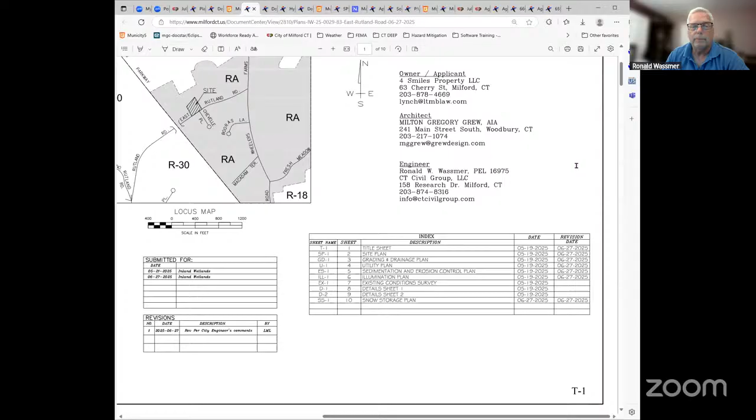A couple other minor changes. If we look at sheet SP1, we've added a couple bits of information. In the northeast corner, we've extended the landscape retaining wall to intersect the existing stone wall. That was a suggestion of the commission, as well as the biologist, Matt Pop, who is here this evening.

We've added a note about the seeding of meadow mix in the northwest and northeast corners. And we've added a note requiring signage along the proposed stockade fence that runs along the rear of the property, stating caution wetlands beyond this fence, no dumping. So an additional notification - the fence will serve both as a landscaping wall and a physical barrier, but the signage will clearly spell out to someone unaware that there's wetlands on the other side of the fence, which aren't directly adjacent but are 40, 50 feet away.

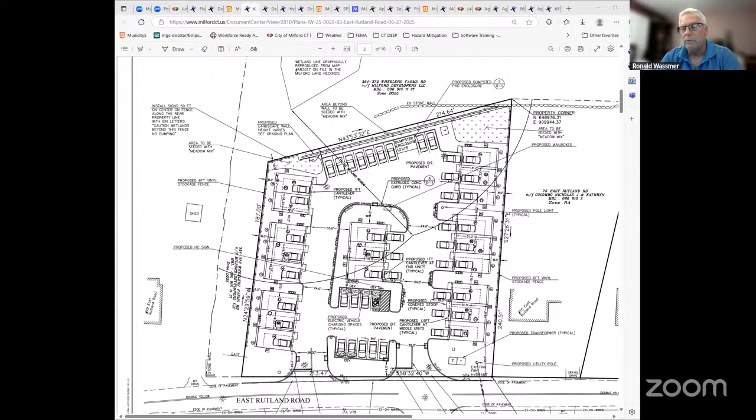So those are my comments. I don't know if Matt wants to chime in, or if you have any questions for me, I'll be happy to entertain any questions.

Thanks, Mr. Wassmer. Mr. Pop, do you want an opportunity to add anything to the record? Good evening, I'm Matthew Pop, landscape architect, professional wetland scientist, Environmental Land Solutions.

The only thing I would add is we added that small section of wall from the retaining wall to the existing wall. I think maybe right where it meets the existing wall, we want to remove 2 feet of the existing wall, so any turtles that may walk up in there don't get trapped in that V-shaped area. So right there.

Thank you, Mr. Pop. That was going to be one of my questions. On the plan, it becomes obvious. Okay, thank you very much, Mr. Pop. Any questions from the agency?

Mr. Black. Yeah, through you, Mr. Chair - it was mentioned a couple times in the engineer's report about a detailed operation plan for snow storage if it exceeds the limit on the plans. Is that something that is in the works?

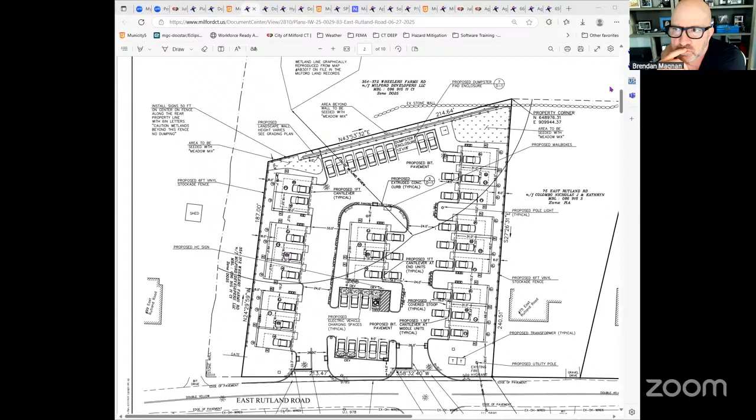I believe we saw that on the plan when Mr. Wassmer was speaking to it. MaryRose, can you go back to that section of the plan? I believe that's the last sheet 10. I believe that may be addressing your question.

Yeah, but in keynote C, it said alternate measures employed if stockpile reaches capacity, in the event of multiple snowstorms occurring prior to melting, or a snowstorm of greater volume than can be accommodated - excess snow will be moved off-site. Does that need an operations plan to move that off site?

I would ask the question to Mr. Jim Connors. Normally, what do we do there for MaryRose? Is that usually sufficient, or I kind of defer to you guys on that part? This is your expertise.

You're on mute, Jim. MaryRose, can you unmute him by any chance? There you go. Okay, yep. I just got into the meeting, it wouldn't let me in.

What was the question, Brendan? Mr. Black is asking about Article C, and it refers to if the snowstorm volume is greater than the stockpiles can handle, it would have to be removed off-site. And is it sufficient? In the real world, what would happen is some of the parking places would get taken up with a pile of snow.

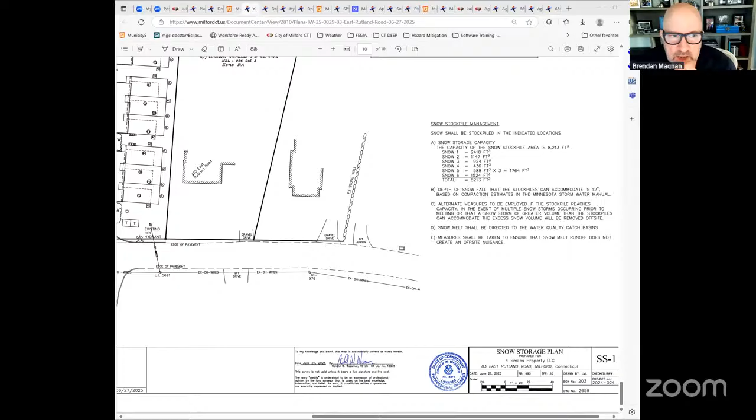Again, back to Mr. Connors, because we kind of defer to you on these. Yeah, you were in late. MaryRose, can you just kind of show the plan itself as to how the applicant has proposed it, and do you have any observations or comments around those?

Looking at the plan where it's showing Snow 5, but it'll never get pushed into there in 100 years because snow doesn't like to go around corners. Snow 6 will get snow pushed in. Snow 5 again, possibly, but they're going to end up using those parking spaces because you get over a few inches of snow, and in that parking lot, you're going to have a lot of volume by the time it pushes all the way down there.

There seems to be 3 Snow 5s. There's Snow 5 and there's Snow 5, it's the 2 corner islands at the end of the parking space. Snow 6 is in the center. Right, but at the actual bottom of the plan there are 3 Snow 5s. Well, the snow is going to get pushed. Yeah, well those side ones, very little snow is going to end up there. Snow pushes straight, basically, and it's going to be pushed down right at the end of that driveway where it's going out.

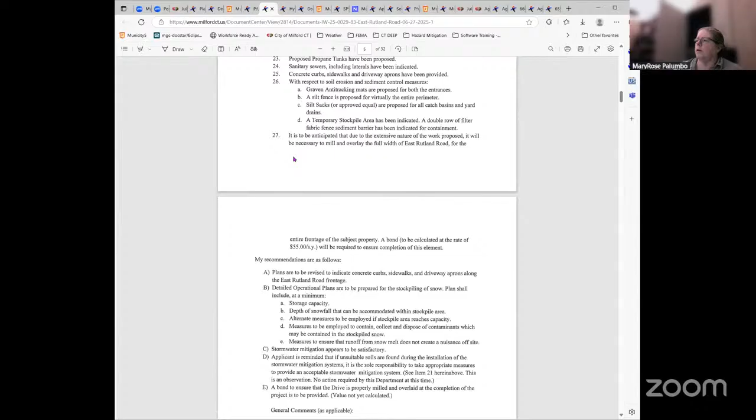And then, MaryRose, can you just show us the exchange from the engineer and the confirmation from him acknowledging that he is satisfied? Well, what you're seeing now is the city engineer's memo from June 26th. It enumerates what he looked at and each of his steps. I've settled here on the recommendations, although I can run through the whole memo if you'd like.

No, that's fine. Okay, I see Article C, as was testified by Mr. Wassmer. Okay. Any other questions from the agency?

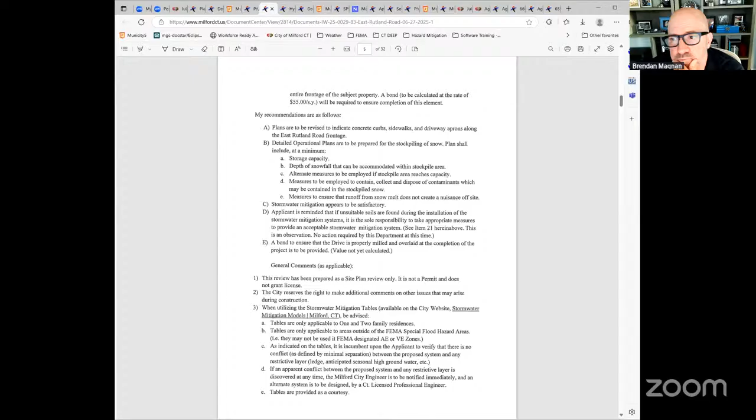One question, is there extra parking places in this plan other than visitor parking places? Yes, there are. So the largest snow pile that we proposed is snow number 1. So those are in excess of the parking and exclusive of the electric vehicle charging stations, which we have several of, maybe 6 or 7.

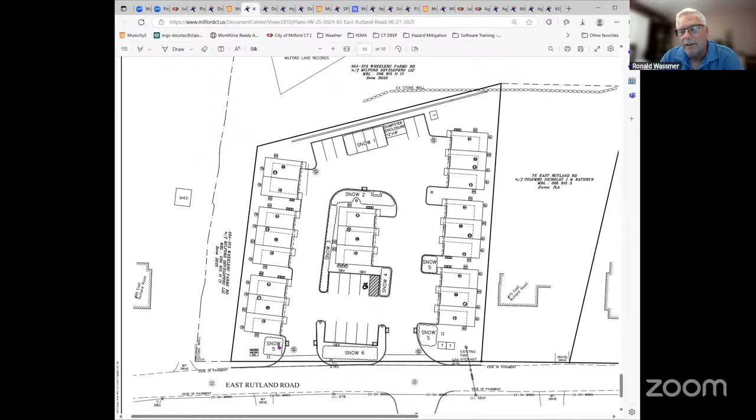You did comment, or Brendan commented, that there's 3 areas labeled as snow number 5. So the reason there's 3 of them is they're all generally the same size, and on the right side of the plan we defined the dimensions of those piles. So you'll see snow number 5 times 3.

How big are those number 5 areas, Ron? About 600 cubic feet. So like 15 by 15 by, I think I went about 4.5, 5 feet tall. None of them are excessively tall. Maybe number one is 7 feet tall, 6 feet tall.

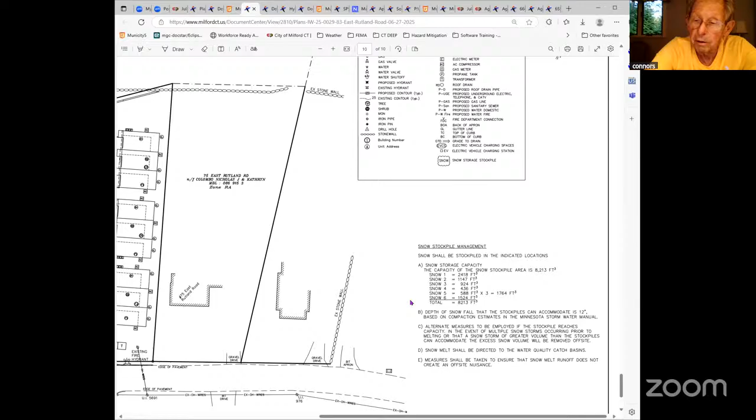Okay, well the ones that are going to take the most of it, truthfully — I'm not against it — but those end parking spaces, because the snowplow is going to push straight down those driveways first, and then clean out the parking area. Again, this is for a 12-inch storm, which isn't really a frequent storm in Milford. But in the event we get a 12-inch storm, they could bring a loader in here to move the stuff around more so than just a plow.

Yeah, okay, no problem. Because we end up, as you know, at our complex doing the same thing. Thank you.

Okay, great. Any other questions unrelated to the snow shelves? Okay, what's the prerogative of the agency? It sounds like we have an understanding of the application. We've discussed it, we've asked numerous questions. The applicant has made numerous improvements based on the discussions, including the acknowledgement of the fence for the turtle.

Maros, how would we address, if we were inclined to make a motion in favor of this, Mr. Pop's comment tonight that the plan would need to reflect that there would be this gap for the turtle not to get caught in that V? Would that be just a condition of approval?

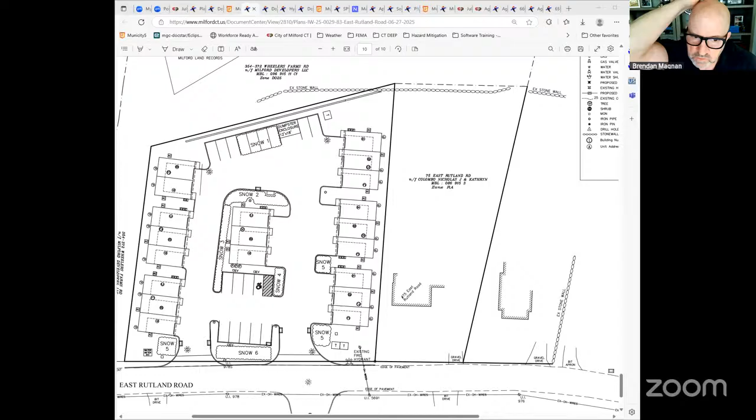That can be a condition of approval. That can be added, saying something to the effect of landscaping, minor landscaping changes per the landscape architect.

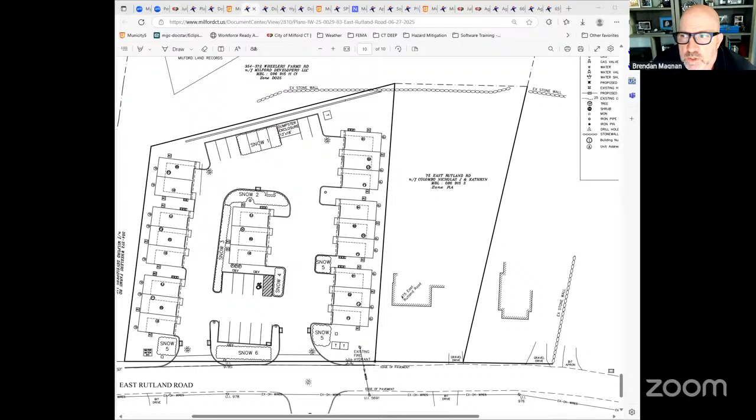Yeah. Thank you for that. I have a comment, if you don't mind. Yes, go ahead, Mr. Mossman.

You can make the statement that the connection of the landscape wall to the stone wall will be done at the direction of the wetland biologist. Thank you for that suggestion. Appreciate that. Thank you, partner. Sounds good. Great.

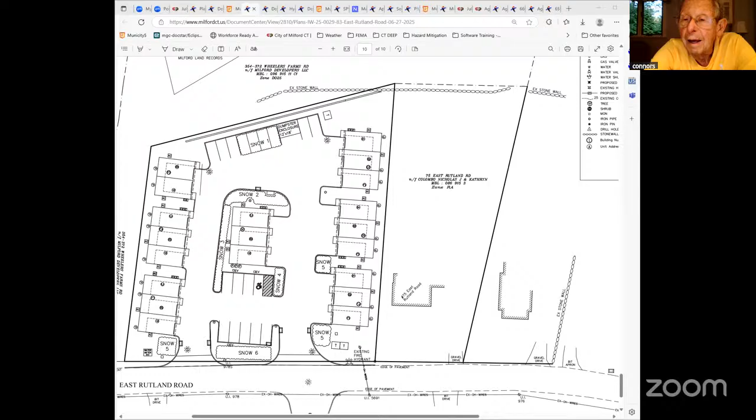I'm pleased with the modifications. I'm assuming, since there's no other questions, we're in a position to take an action. Is there someone that would like to make a motion? I can make the motion. Go ahead, I'll second it.

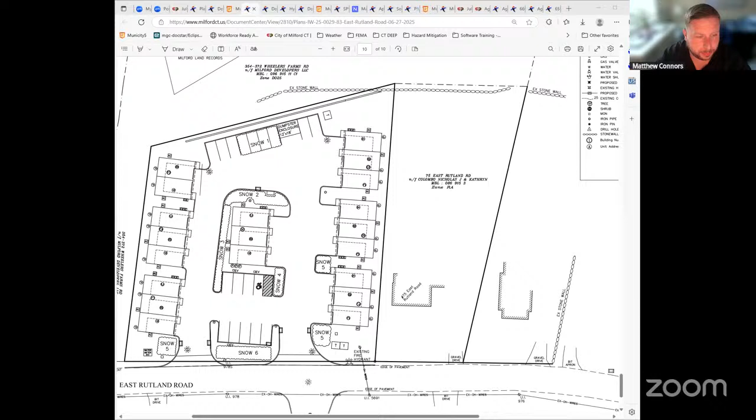Mr. Chairman, I move, after duly considering all relevant factors, to approve application IW-25-0029, 83 East Rutland Road, based on the plans entitled Site Plans 8-30G, Affordable Housing Project, 83 East Rutland Road, Milford, Connecticut, by CT Civil Group LLC, 10 sheets, 1 through 9, dated 5/19/25, revised 6/27/25, sheet 10 dated 6/27/25.

The information in the file and presented this evening supports the following reasons: this action will not have an impact or effect on the physical characteristics of the adjacent wetlands and watercourses, with conditions including the permittee will submit a construction plan prior to taking out the permit; soil erosion and sedimentation controls as outlined on the plans and in the CT-DEP 2024 erosion and sedimentation control guidelines must be installed and maintained on the site until the property is stabilized; wetland notification to be placed on the as-built and in the property deed to give notification to property owners that permits are required from the MIWA to work on the site; compliance with the city engineer's requirements for stormwater; and adjustments made to the landscaping as guided by the biologist. That is my motion.

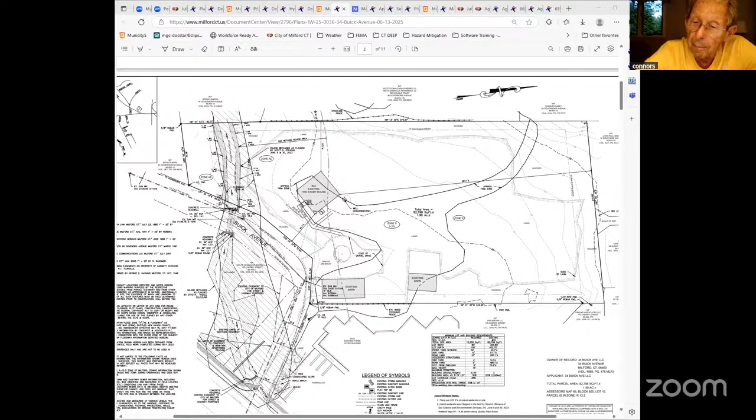I have a couple of questions on the paver driveway or parking area. My gut feeling is that if that paver driveway or parking area doesn't remain super clean in all the joints from dirt from the tires or whatever, I can't see how it's going to drain that parking lot other than surface draining into the brook. For what reason did you go with that versus a conventional drainage system with galleys and catch basins that ultimately end up in the brook, which doesn't need as much maintenance as the paver driveway, since that's going to need a lot of maintenance to keep functioning?

I think that's a good question. Mr. Weway, do you want the opportunity to answer that now, or answer it during the public hearing, or both?

I think the bulk of it will be presented at the public hearing, but to answer the question with regards to why we chose the pavers as opposed to a galley type system: it's because of the proximity to the wetlands and the stream. If you look at the test hole data, we don't have very deep soils throughout the site to be able to put a galley type system in, because typically your galleys are going to be anywhere from 18 inches to 4 feet high. By the time you factor in your separating distance to the seasonal groundwater table and provide sufficient cover over the top, you need pretty deep soils to get that type of system in. Again, the pavers distribute the stormwater over the entire site, whereas with galley systems, all that collected water gets concentrated into a very small area, depending on the size of the galleries. So by spreading the system out over pretty much the entire site, your groundwater mounding that typically takes place is much less than what you'd encounter within a galley system.

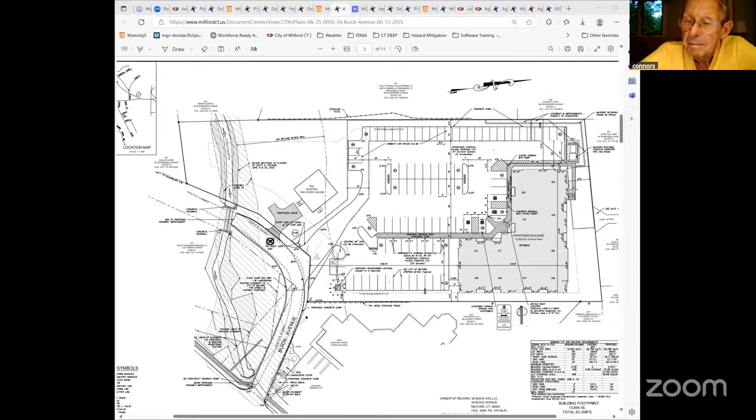Mr. Weiwei, when you're explaining this to us, could you also incorporate what considerations went into your selection of this best practice? Specifically, was this system more expensive, less expensive, or cost neutral compared to other options, in terms of one-time costs and overall long-term maintenance costs? Help educate the agency on what the considerations were as you weighed these best practice options.

Yes, we could certainly incorporate that into the presentation. Great, thank you. Mr. Matt Connors, I think you were up next.

Through you, Mr. Chair, just to your point during the site walk, maybe some language about cleaning up that area that had some dumping in it. I appreciate the planting list, but maybe also incorporate, you know, highlighting the fact that there are trees on the property being removed, and then highlighting that they are being replaced to a certain extent within the plans.

To echo that, I think the agency, on complex applications like this, would like the applicant to clearly lay out what trees are being proposed to be altered or removed in any way, and what plantings are being proposed. I'd like that to be a topic of focus as well.

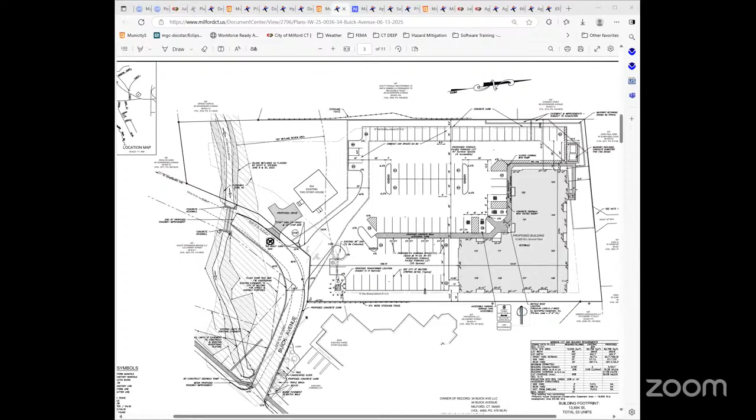So this is a little bit nuanced, right? They're going to have to secure the rights to do the development, and we still have regulation authority regardless of who owns the property. Right, MaryRose? This is Attorney Crusaden. When you're done speaking, if I can also make a comment on that. Thanks. Okay, sure. Through you, Mr. Chairman,

the development requires changes to the road. There's easements along the road to do changes if and when they're necessary. Development of this property would necessitate those improvements to the roadway. So yes, we're regulating that work. The reason we walked that, the reason we asked to have it staked, is we're regulating work which is within 100 feet of the off-site wetland, which had been previously flagged, I believe, in 1995 -- 1990. The closest point is right by the throat of the roadway where the storm drainage will go into the culvert. It's about 4 feet from the wetland there, because the wetland goes right to the culvert, and then pulls away a bit when you come around the curve on Buick Avenue.

I think Mr. Crusaden is going to embellish on that. Great, sure, go ahead, Mr. Crusaden. Yeah, thank you, MaryRose and Mr. Chair. It's an excellent question. Buick Ave is a city street, and as part of the development in the area where the billboards are, there was an approval done years ago for a very similar project, I forget exactly how many units, but I think it was a mixed use or something. It was obviously never built. But as part of that approval, the city was given an easement for right-of-way improvements along the area that we're proposing to perform the right-of-way improvements.

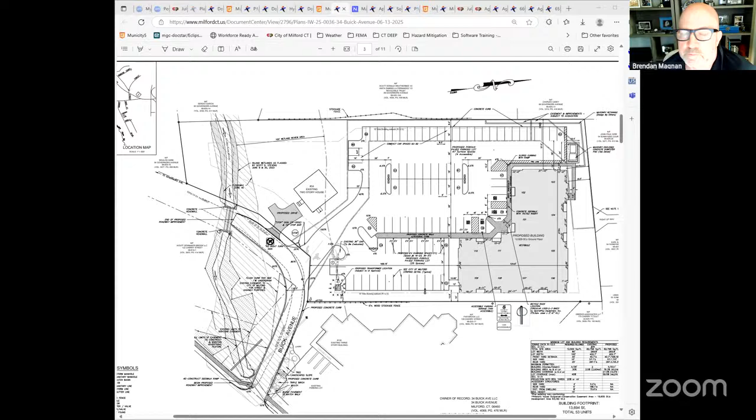So Mr. Matt Connors, any further comments? You had your hand raised. Just in regards to the plantings, MaryRose, if you can pull up that plan real quick.

Yeah, I just noticed the plantings to the west of the driveway. Is it possible, and correct me if I'm wrong, MaryRose, would it make more sense to move those plantings to the east side to capture more of the runoff from the parking lot? I mean basically the exact opposite of where they are relative to the driveway. Yep, the ones in a row, 2, 4, 6, if you moved them to the opposite side of the driveway, more towards the parking.

Sorry, I wish I could control your mouse, but I can't. I know what Matthew's saying, so go up from there to the right. Nope, go to the right, along the driveway. Yes, there we go. Thank you, Brendan. If you can move those plantings over there, would that make more sense to capture more of the runoff from the actual parking? Because once it hits that driveway, it kind of just has a straight runway down to the road, correct? There is a driveway exit here, and these cars have to come out here.

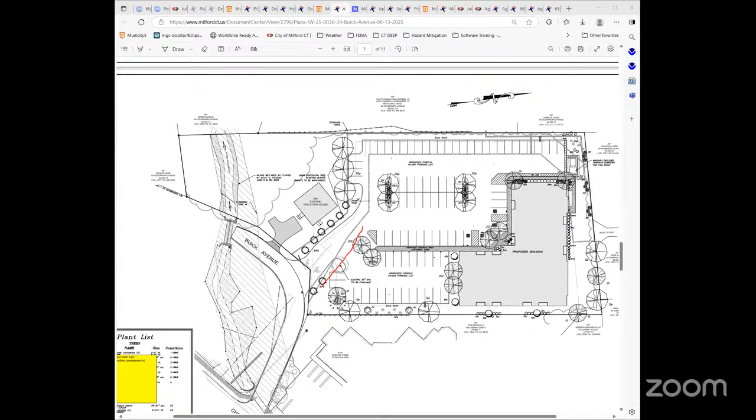I'm just talking major storms, like maybe 2-inch events within hours. So you're saying even during those storm events there's no chance of any runoff on the property, even though you mentioned you're going to raise the pitch? Yeah, these systems and the permeability factored into those joints takes into account very intense rainfall events.

Okay, so I could present some information at the public hearing that would attest to that. If you could do more clarification with that, that would be great, because if I'm confused, I'm sure other people would be.

Thank you, Mr. Connors. I think for us, we're sensitive to the upland review areas, but just want to understand the impacts from the proposed development that would potentially affect those upland review areas. It would be interesting to understand what alternatives you considered in terms of best practice storm management, and what you considered and why you ruled them out.

MaryRose, with your years of experience and the complexity of this application, is there anything you feel we haven't identified that we need to address, or anything we need to consider that we haven't?

We haven't had the city engineer's review, so I don't know what's going to come up in that, and if that's going to cause a bit of a rush right before the public hearing. We will get that information to you as quickly as we get it.

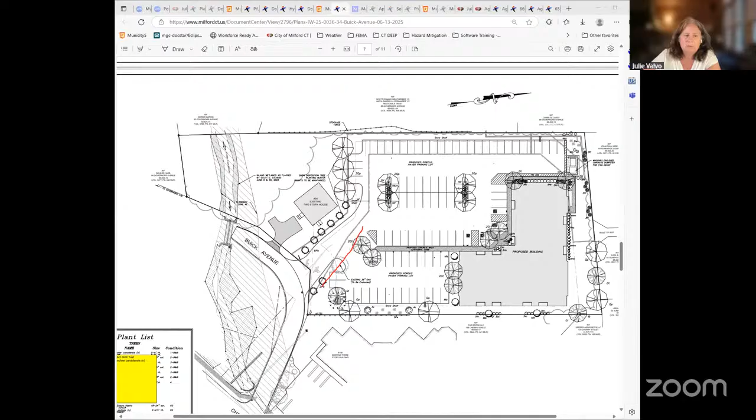Can I answer that, and what's probably going to happen? We probably need the applicant to answer that one, Mr. Connors. Okay.

Yeah, again, the snow removal on Buick Avenue is going to be the responsibility of the city, just as it is today. You've got the existing roadway, and the city goes in there and plows it out for every snowfall event, so nothing's going to change with respect to that. The only caveat is that the pavement will be a little bit wider in the portions that we're showing. The pavement's basically getting widened out as shown on the drawings, and that would be the extent of it.

Mr. Weiwei, will you take us through again, just to help focus the conversation on those improvements on the roadway that are proposed—walk us through an end-to-end review of the approach you're proposing? For example, are there silt fences going to be installed to protect any construction on the roadway changes itself, to protect the wetlands that were marked in 1995? Will you take us through all that thinking?

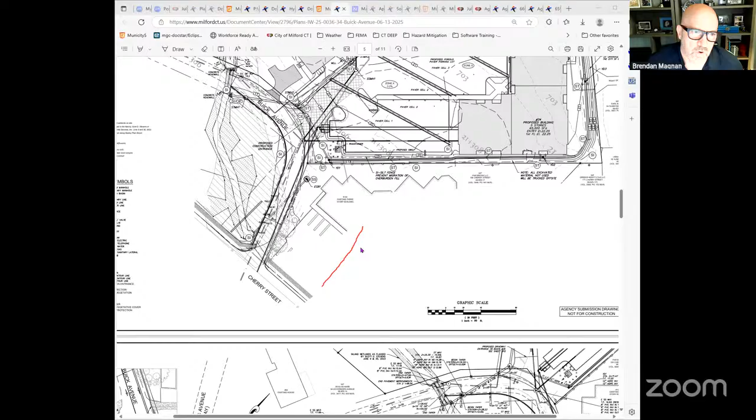Yes, I think MaryRose is pulling it up, but on our soil erosion sediment control plan, we are identifying silt fencing to be placed on the south side of Buick Avenue along its entirety for the reconstructed area.

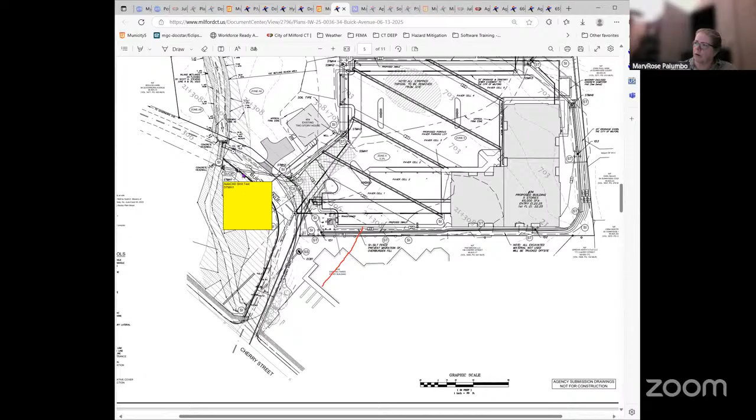Is that shown? Is that what you're showing, MaryRose? Yeah, I'm not sure if you can see my mouse, but going along the southern side of Buick Avenue, the SI designation is they're showing silt fence, I believe.

Oh, okay, it almost looks like a road. Sorry, I'm maybe not the best. I think because of the size of the plan, it's kind of coincident with the level curb, the levels, the drain along the side of the road.

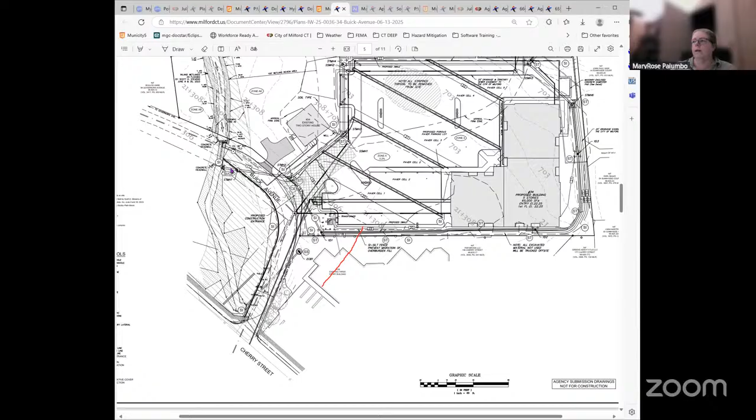I think that's the case, MaryRose, because again, we don't have, even with the easement to the city, that right of way is very narrow. So ideally, if we were reconstructing this to full city standards, that pavement would be out to 30 feet, but we just don't have the right of way to work with.

And the adjoiners on both sides are private owners, so we have to work within the confines of what we have. So that pavement width is going to go out to approximately 20 feet. And with that being said, that silt fencing is going to be pushed right up against the limits of that 20 feet. So that's very important.

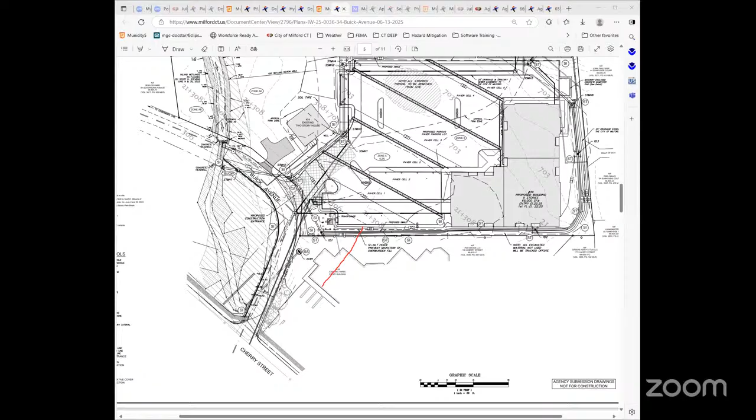If MaryRose, if you can bounce back to the plan profile view that you had on there. Yep. So if you take a look down in the profile view, you'll see that what we have for the proposed grades are mimicking the existing grades out there. So there's very little cut and fill going through that area.

So in part, that was set up that way because of the limited right of way. Because if we were doing a lot of cuts or fills in that area, that would push the grading out beyond the limits of what we have to work with.

Okay, so you're saying that what I hear you just describing is that you're going to have minimal disturbance in the roadway construction. Well, right. I mean, we're going to be basically reconstructing that road and widening it out to the 20 feet. So from the edge of the existing pavement, we are going to be pushing into the upland review area within the Buick Avenue right of way.

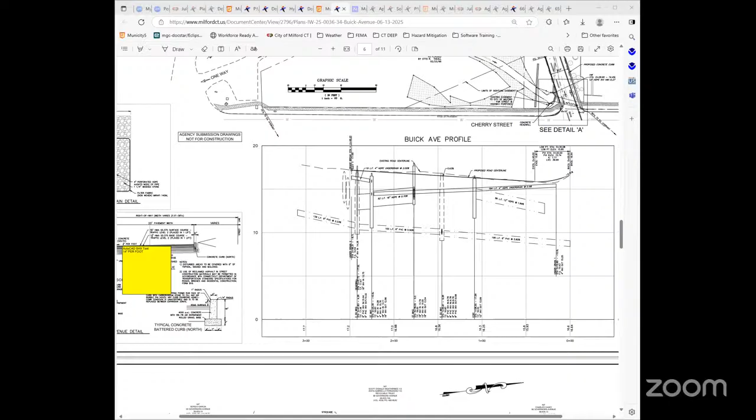I don't know if that makes it clear for you or not. It's a little less fuzzy, but Mr. Gradwell, I'm sure you. Yeah, I think around that same point, Mr. Chair, I'm looking at that plan view, it's on the screen right now. The grading's a little incomplete in that area along that edge, say that west edge of Buick Avenue, as it goes towards the billboard.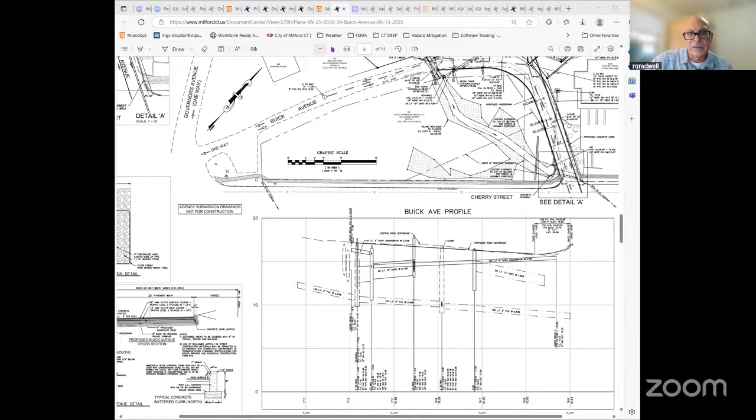It's really hard to tell what kind of contours are in that area or what kind of grades are in that area. So maybe some additional contours in that area, tying into where 16 runs around there, maybe a 16 or 15.5 is in there. It's hard to tell where the contours will end and what kind of impacts in the regulated area or upland review area will be in that area by the billboard.

Yeah, I think given the confines of what we have to work with, to get the contours in there just doesn't make any sense. So what we're holding is the edge of the pavement, and then we did have some topo shots out to the edge of the right of way. So we're confident with what we're showing in that profile view, in terms of the proposed grade.

You could see on there that we're basically holding the existing grade. So there's not going to be massive cuts or fills going through that area. I mean, you're talking about undulations probably in the vicinity of 1 to 3 inches, because by nature once you get off that pavement area, the ground just goes up and down. But we're not doing anything significant in there in terms of grading.

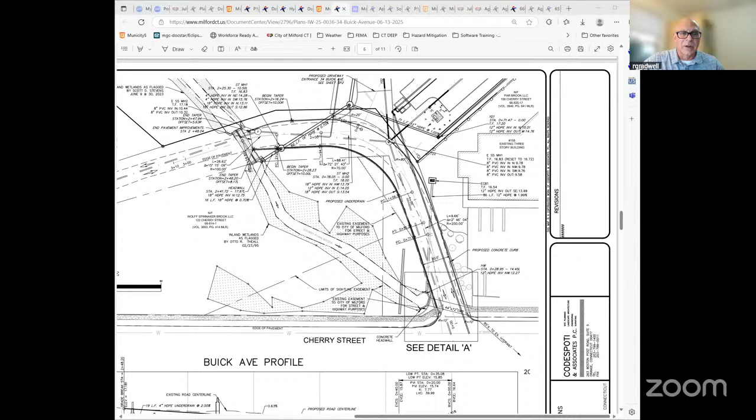Mr. Gradwell, did you have anything further? Yeah, it's hard for me, in my opinion, just a little hard to tell without any contours in between the billboard and edge of the new road. It's really hard to tell what the impacts of that upland review area is going to be in that area.

Yeah, I can understand Mr. Weiwei's spot grades or spot elevations, but it's hard for me to understand how far that may project without actually seeing some contours. I don't know how steep the slope is between the edge of road and edge of wetland in that area. Is it flat, Mr. Weiwei, or is it a couple feet drop? I can't tell based on the information you have here.

Yeah, it's pretty, I'm not sure how many commission members walked back off of Buick Avenue when we tried to get in there and look at where the wetlands were on the Spinnaker site. But that whole area is pretty flat. There are hummocks in there.

The grades are kind of up and down, but for the most part relatively flat through there. I'm not sure if this is where you're coming from, but again, we have to keep all of our work within the right-of-way limits as well as the easement limits. So what you're seeing on that plan depicted on the south side of Buick Avenue, that is the limits of our work. We're not going beyond that because we don't have the rights to go beyond the street line.

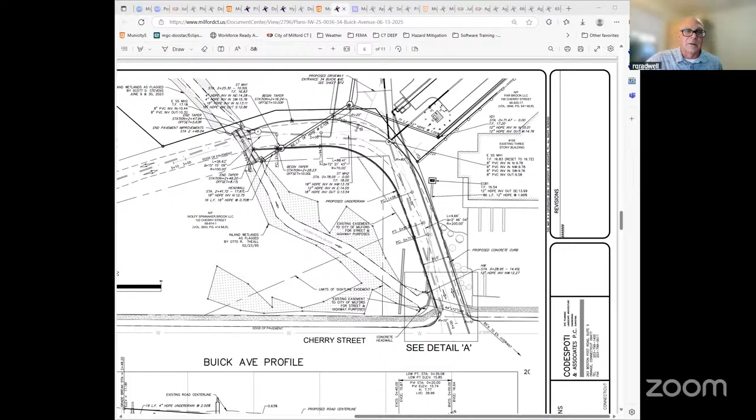Yeah, that would be what I'd be looking for, Mr. Weiwei — a section through that area to see how your impacts may be right at the edge of that right-of-way line. A section will tell you that, and that would be good to present to the commission as well.

Yeah, we already have that done. It's in work map format, so I just have to dress it up for presentation to get you a little more information. Mary Rose, can you just scroll down on that to get to the profile?

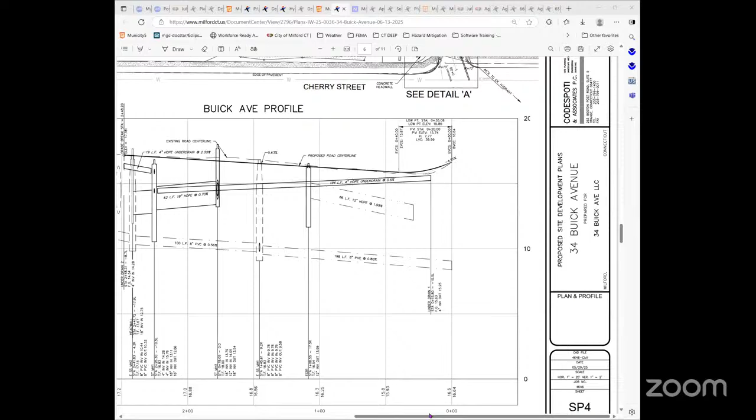If you look in the center there, you'll see what I'm saying, that everything is pretty flattened through there. So we have a grade on the road of 0.63%, which is very flat by any standard. When you look at the profile view, this has an exaggerated scale of 10:1. So if I were to draw this at a 1:1 scale, that line would look horizontal.

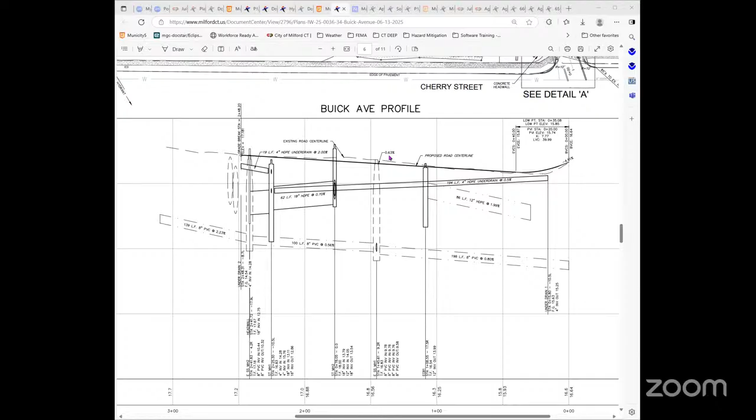Okay, great. Sounds like good clarification. Mr. Weiwei, that would help us understand this proposed plan a little better.

I think hearing no other questions, we've sufficiently surfaced the areas of interest. Unless there's anything else, we can move on.

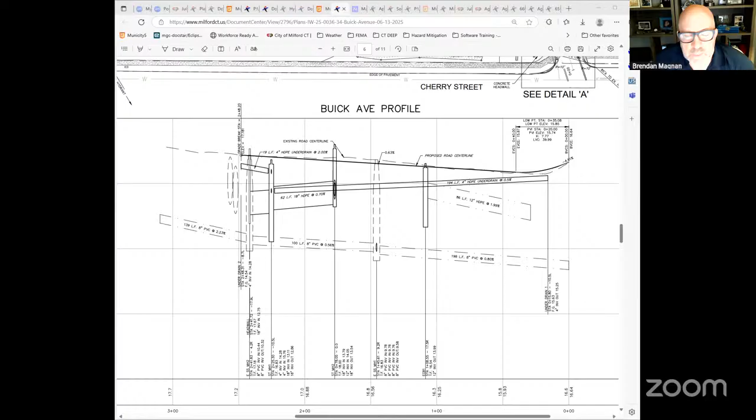The only thing I want to mention, I thought of it earlier — I did request a physical hard copy of the plan. If anyone's so inclined, I'm sure the applicant can make arrangements for you to receive it. Just work through Mary Rose to do that if you're inclined.

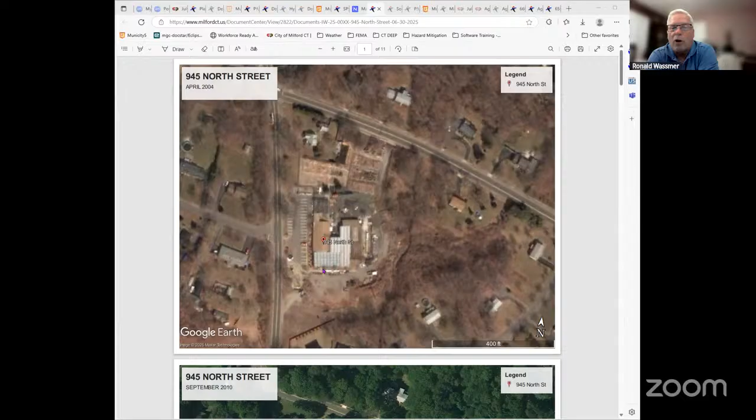On the screen you'll see some snapshots I compiled from Google Earth, I think three of them, dating back in history. The one on the screen right now is from April 2004, showing the extent of the improvements — buildings, paving, etc. — on the site. If you visit the site today, a lot of the pavement is fractured, with weeds growing on it, and the paved sidewalks are overgrown with weeds and small shrubs.

We partially used these images because of some stormwater quality requirements. Mary Rose mentioned, but before I go too far, we submitted these plans recently and the city engineer has not had a chance to review them, nor have I had a chance to review with him. But setting that aside, we'll give you a brief overview of the project, and of course you can ask questions or decide if you want to do a site walk — I don't need to tell you what you guys can do.

Again, on the screen right now are some aerial photos from Google Earth. The proposal to reconstruct this garden center utilizes the footprint that is there now. They're going to reuse the same foundation. They're not expanding the building — we are actually reducing parking and impervious surfaces.

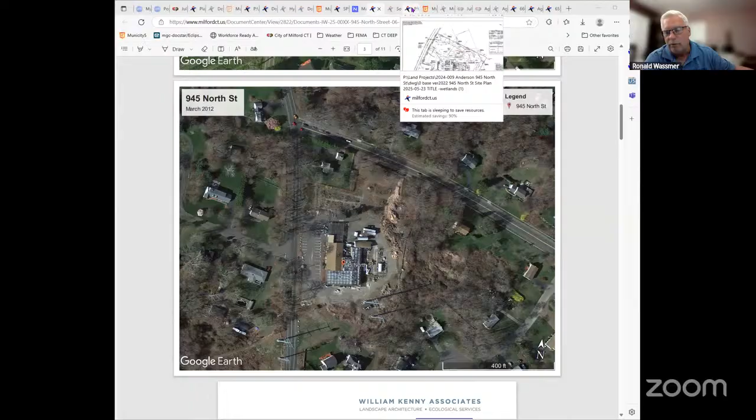There are several record maps — I'm not sure if we submitted them — that we obtained from planning and zoning showing various iterations of this project over the last, say, 30 to 40 years, showing the building, the parking, etc.

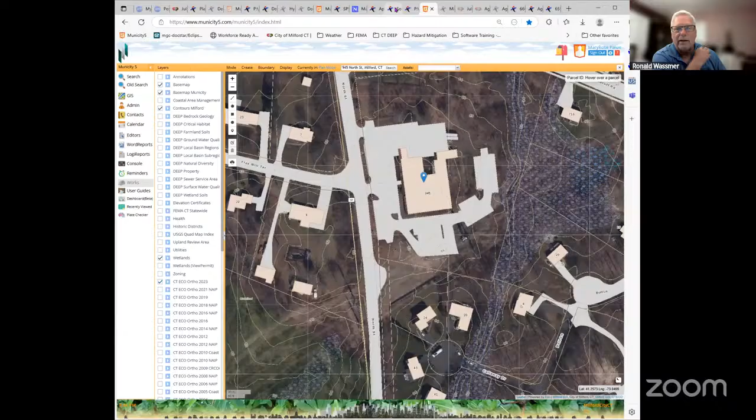There are wetlands on the property. I didn't know the name of it, but Mary Rose just said it's called the Flaxmill Brook. Is that correct, Mary Rose? That is Flaxmill Brook — it runs from North Street down through this property, from Kozlowski Drive over to Flaxmill Lane, and then under Flaxmill Lane into the wetland. Yeah, the brook starts on the wetlands over by Platt Tech, funnels through that little lane — I think it's called Bolt Lane. But we're getting a little off-site at this point, so I won't focus too much on that.

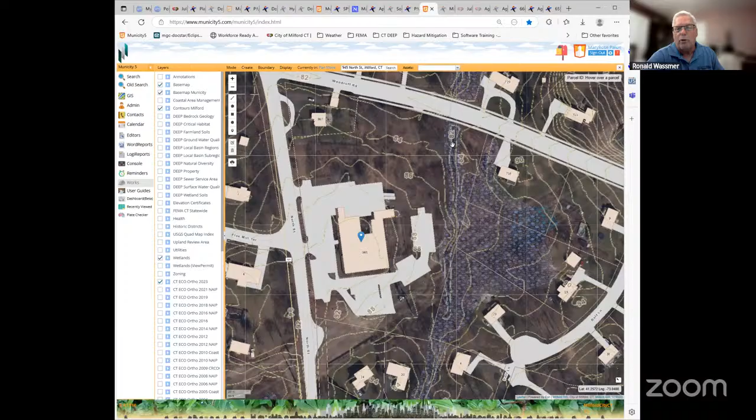Along the easterly border of the property is Flaxmill Brook. It's a continuously running brook, even in the driest of times. The wetlands are primarily a riparian zone along that brook. The wetlands were flagged by William Kenny.

Yep, sorry, I think you got a different one up on there at the moment. There we go — sorry, okay, I was having trouble getting the map up. That's okay.

Of the current site and the previous iterations of this garden center, there are no stormwater drainage facilities, no stormwater mitigation, no water quality features. We're proposing stormwater mitigation and we are reducing the impervious surfaces. It's my understanding that reconstruction developments are to adhere to Connecticut guidelines for water quality, so that's our intention here.

You can flip to the grading and drainage plan, probably one more sheet ahead. Actually, this is kind of busy — let's go back one sheet and I'll just give an overview of the project again. There's something red on there, I'm not sure what that is. It's the removal of the parking lot. Oh, okay, thank you very much.

The existing entrance primarily is from North Street, and the parking lots that are there generally follow along the existing parking. You'll see some lines in red that are the existing parking lots — they're dilapidated and overgrown, but the impervious pavement is there, as well as the compacted gravel subbase. So those are being removed.

The property is bisected by the CL&P right of way — the high voltage lines. There happen to be a couple of towers on our property, and a communication building on our property. Obviously, this is not something we're doing or involved with — that's done by the utility company.

So any activity under the power lines is really by the utility company. However, it is our land, so we do have the right to use it within reason.

We're reconstructing portions of the parking lot, but also eliminating significant portions of parking lot. The main entrance is on North Street, and the main parking lot is on North Street. There is an existing compacted gravel road, as well as a driveway apron that exits out onto Woodruff Road. We're going to utilize that again.

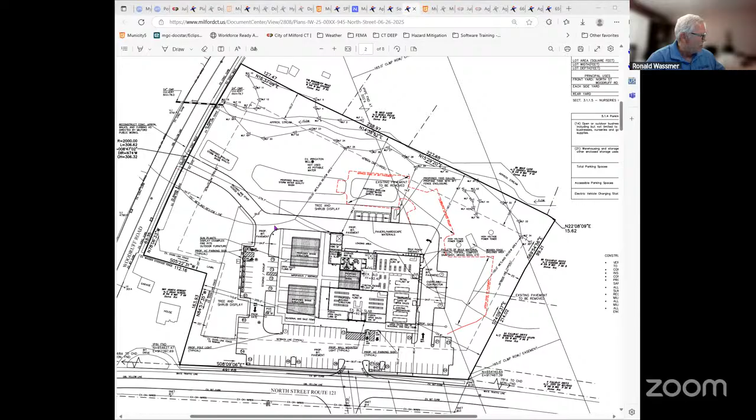So we do have a full set of plans. Matt Popp is here this evening. There's significant landscaping involved, as well as wetland mitigation plantings around these ponds and within the ponds, as well as street trees and buffer plantings. There's a neighbor to the northwest corner, an existing house. It's been there forever, for a long time, just as this garden center has.

So I'll entertain any questions and whatever. Yeah, I think we'd be interested in understanding what you just described, if maybe Mr. Popp can speak to it.

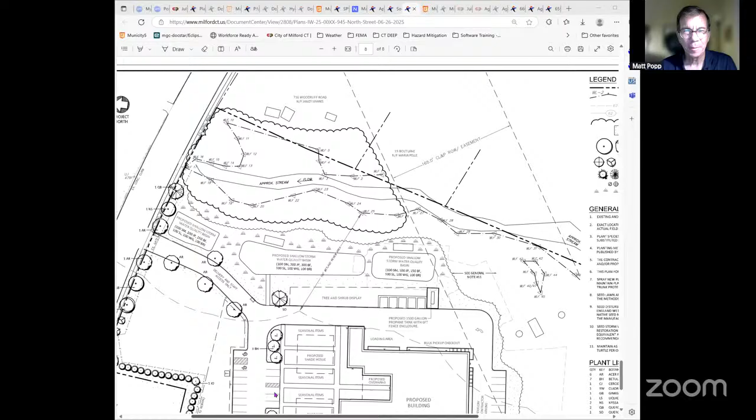Good evening, Matthew Popp, landscape architect, professional wetland scientist from Environmental Land Solutions. I prepared the landscaping plan that you see before you. Just one thing, if you could zoom out just a little bit, you would see along the streets, we have quite a number of street trees, and actually on both frontages, even down there.

Usually I don't use this many types of plants, but since I figure it's a nursery, they may want to kind of show off different types of species here. Most of them are native. So again, it's quite a bit of street trees and trees around the site.

For the water quality basins, the intent is that they would get seeded right when they get graded. So kind of before they receive any water, that they would be seeded, and hopefully some of those seeds would germinate. We also have some plugs that would be put in them.

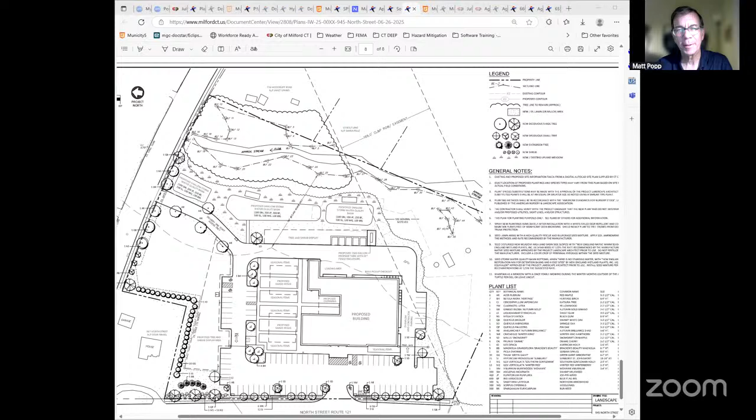At the bottom of the plant list is the plants that go in a water quality basin. Either the last like 5 or 6, Joe Pyeweed, blue flag iris, bur-reed, I think swamp milkweed, go in those. And those come in just like a 2-inch plug they get put in.

As Ron said, the existing building there is dilapidated, it's falling apart, somewhat of a hazard. We are pulling back from the wetland and the water course back there. And again, as Ron noted, there's no real water quality treatment on site now, and we're proposing those water quality basins. So with that said, I think this would be an enhancement to the wetland system.

Great, thanks, that's great to hear, Mr. Popp. Very encouraging. Could you just expand on my first question, the removal of the pavement in that area over on the right side? What's the treatment of that area going to look like?

Once that gets removed, I'd show that area as probably seeded with just a lawn mix. Is it going to be just sort of flat? There's not going to be a lot of disturbance. How is that going to be finished when the pavement's taken out?

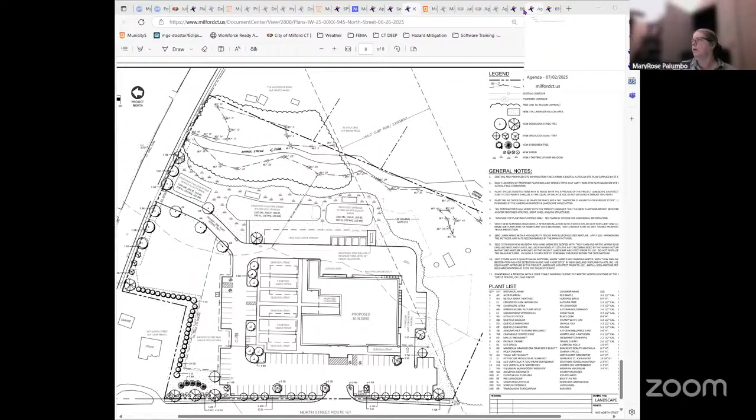Sorry, MaryRose, keep me honest, what's the July 18th date? July 18th is the deadline for petition. The first number in that grouping of three numbers is when we received it. The second number is the 14-day deadline for petitions to be received for public hearing. The third set of numbers is the 65-day deadline to have a public hearing.

As it's on the agenda for the first time, is there any interest in scheduling a site walk? I'm assuming there isn't; we're all pretty familiar with the property, it's not very complicated, I'm pretty comfortable with it. I'm only saying this out loud because I want to make sure we're honoring this applicant's investment in the property and expediting our review process as fast as we can.

And MaryRose, to that extent, I would suggest the applicant make a request if, for example, the engineer's review is done before the next meeting, we could entertain this motion before the public hearing, if that were something the applicant was interested in, so that they weren't sitting behind a long, complicated review process.